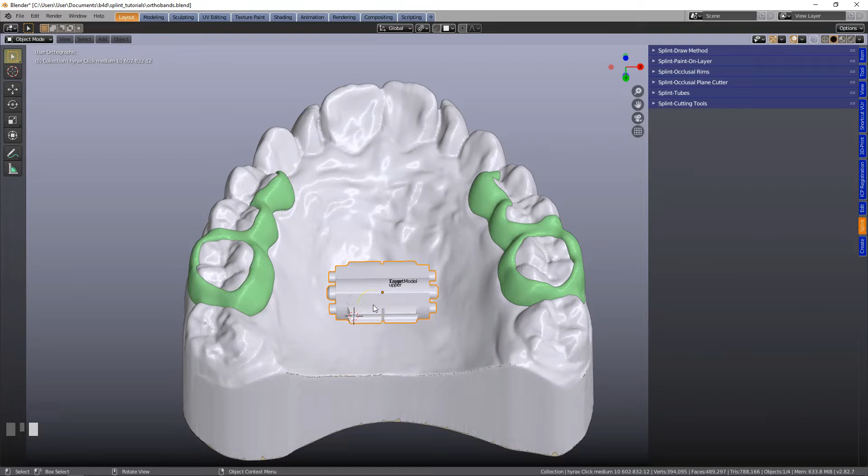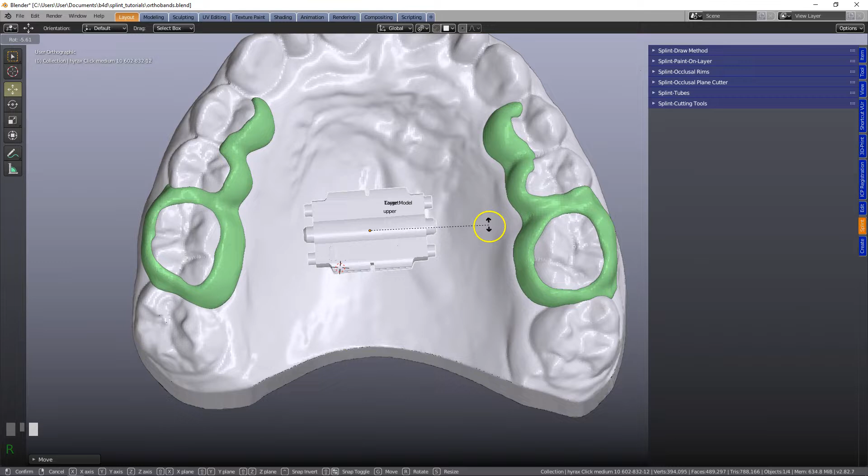Now once a component, the expansion screw, has been imported, we need to make sure that we only move this according to the Blender coordinates. By using the transformation on the left hand side, we can move it by using the arrows, or using GX or GY or GZ. This is important that users don't rotate it in any different direction, because we need to ensure that the tube gets extruded along the X direction so that it fits exactly into this wedge.

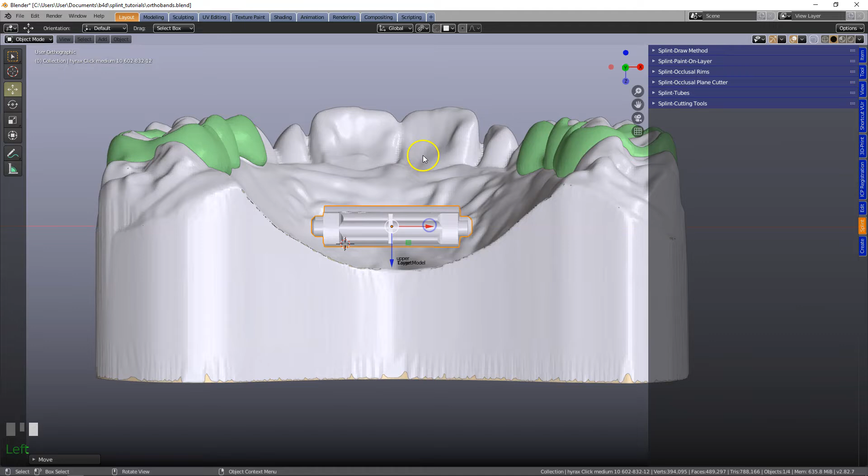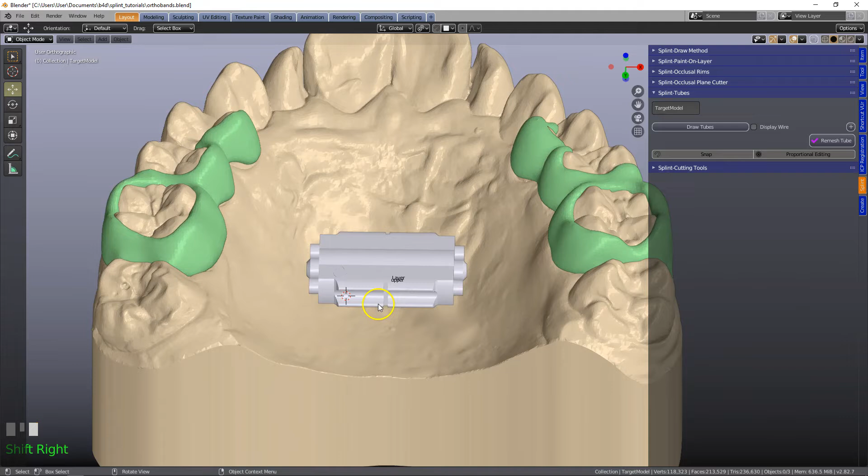So moving the component where it should be located, we will then hide the passive model away from the view, as we don't need to see it at this stage. Then, double checking that the component is correct, we're going to then open up the tubes. The expansion screw needs to be placed a little bit closer towards the palate, and then Shift right click to place the cursor.

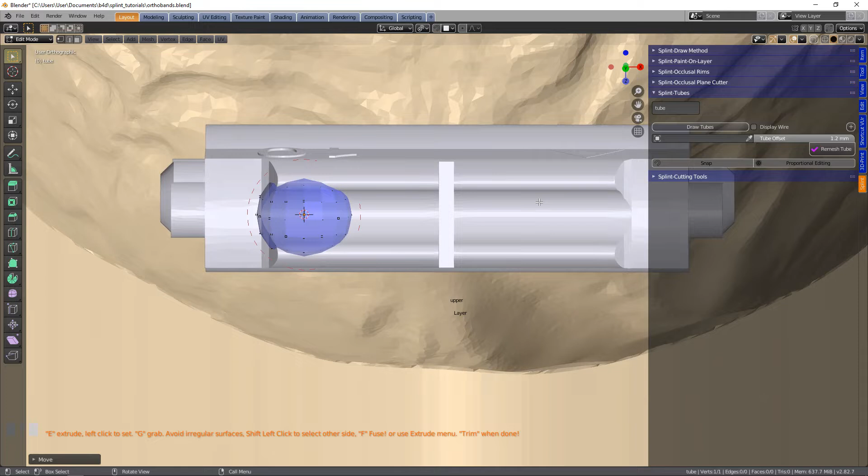Then draw tubes. This places a sphere on the inside of the wedge, and now by using E to extrude and X in the X direction. At this stage we need to make sure that the snapping tool is not engaged, and then using E and the X, it will extrude parallel to our component.

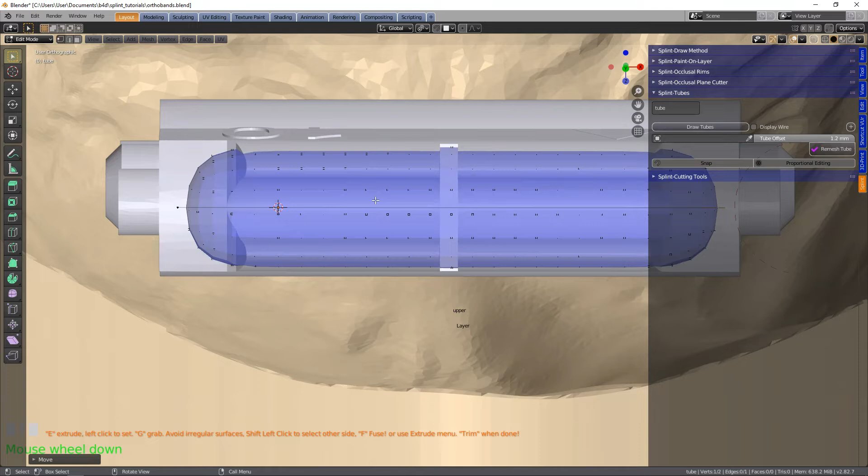Selecting the other side, G to grab, X in the X direction, G to grab and X in the X direction. Now this may be a little bit large, we need to downscale it, and one can see that the subdivisions have been marked. So to unmark them, toggle the Tab key, tab in and tab out, and that will disappear. A to select all the vertices, and then Control A to make it smaller.

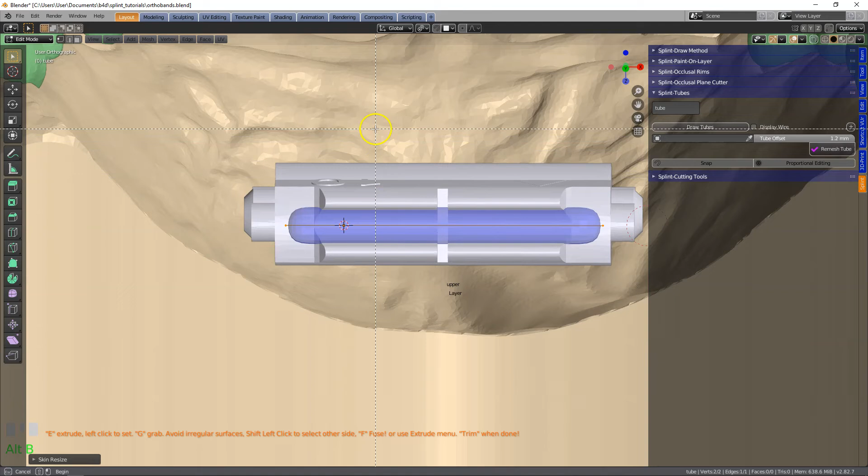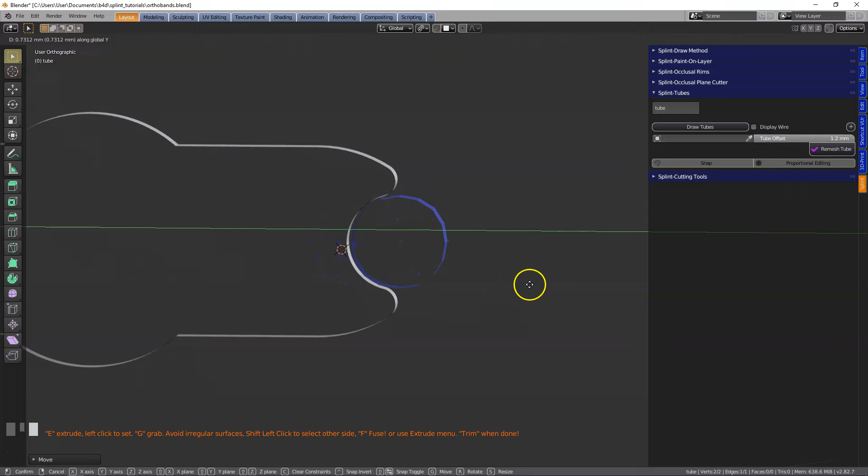Alt B to make a cross section, and we're going to view it from the side. Now we are still in edit mode and we have selected all of them. A, make sure that they're selected, and then using GY in the Y direction, and then maybe a little bit smaller, Control A, and then placing it correctly.

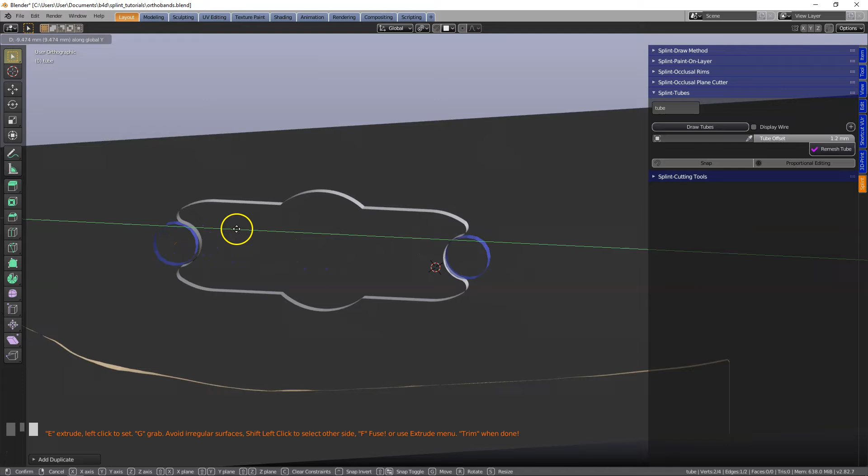We are then going to duplicate these two vertices by using Shift D to duplicate, and then using GY to move it into the Y direction, and GY to make sure it's placed correctly. Now we can use Alt B to exit.

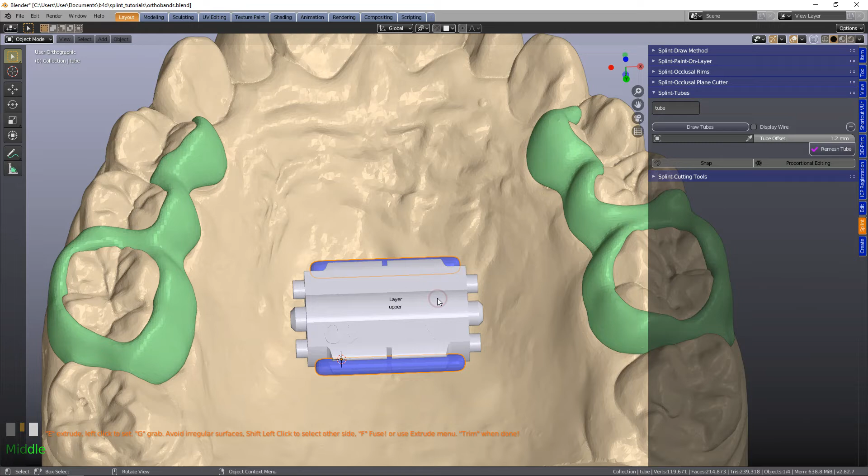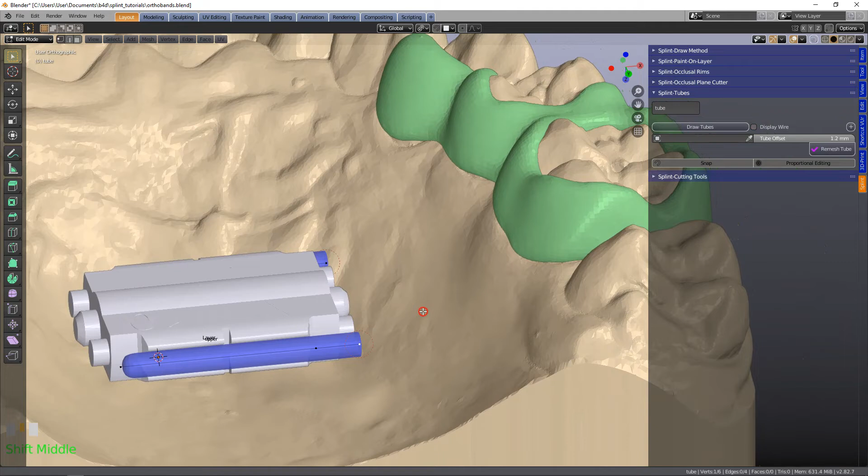Next we're going to select our object, Tab to go into edit mode, and we're going to be selecting both vertices on either side, and then E to extrude and X into the X direction. This is important so that our tubes don't bend when we move them upwards. Then select one vertex, make sure that the snapping is on the magnet tool, because we're going to snap it to our band. And the same, E to extrude, and then move it up to the band.

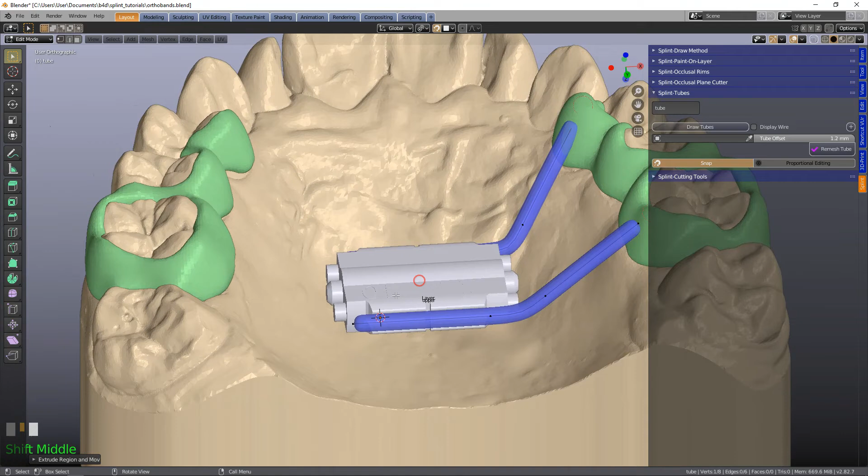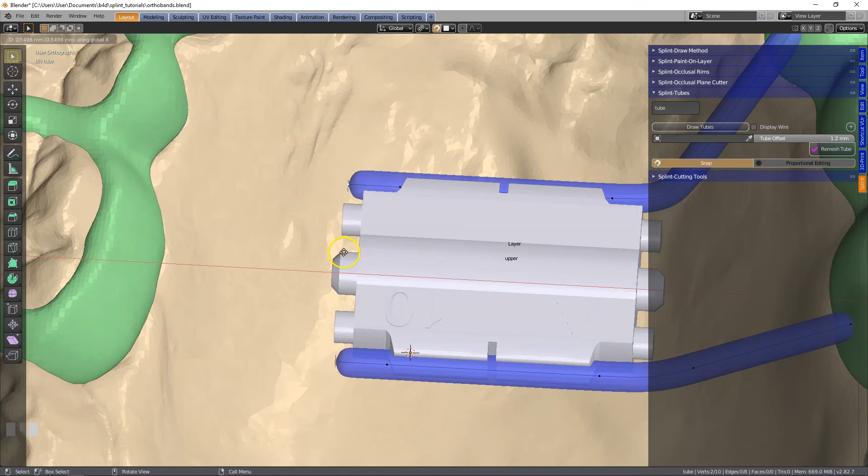Here we can see we haven't extruded it, so we need to be careful to select both, E to extrude in the X direction, and then selecting one of the vertices and then making sure the snapping tool is on, E, and then move it up and snap it onto the band.

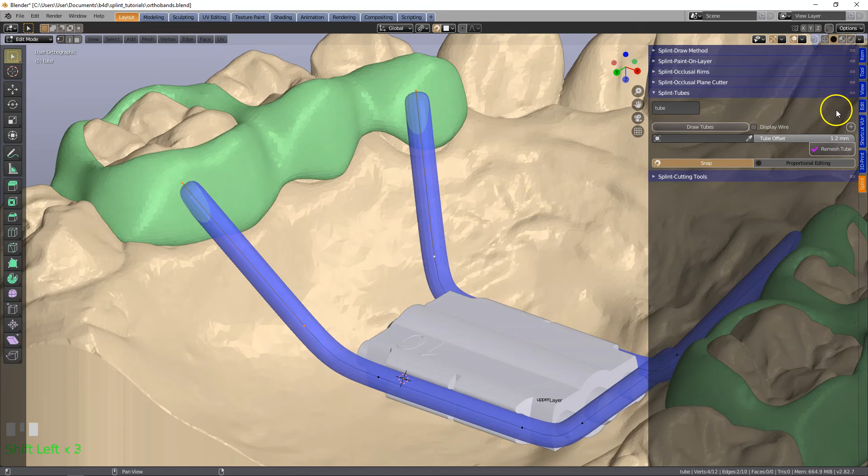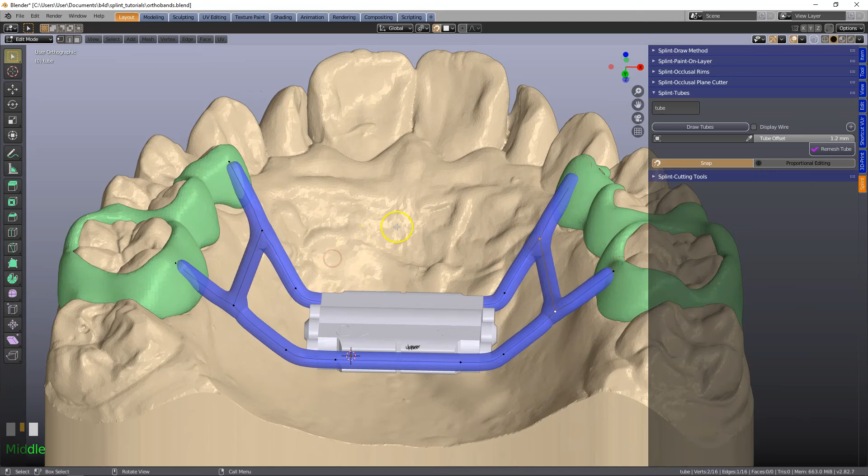We can reinforce these wires by selecting four of them and then clicking on the plus sign and then selecting two of them and using the F key to fuse them. And likewise we can do the same on the other side. And fuse them. Once we are done, we can display the wire.

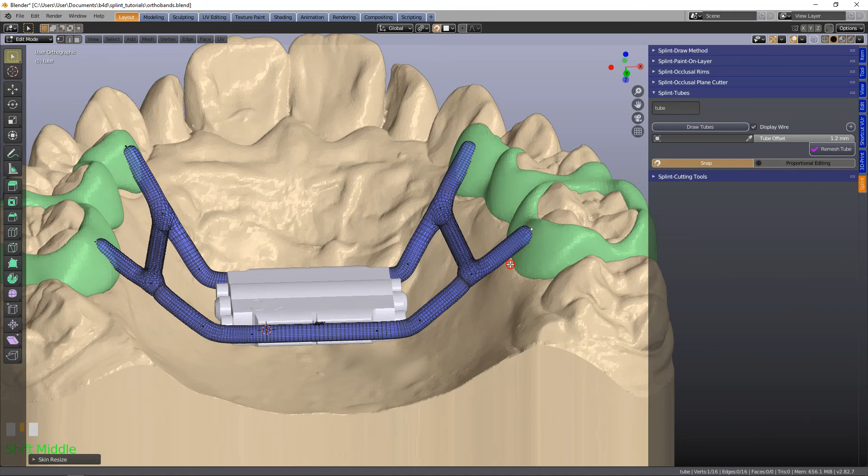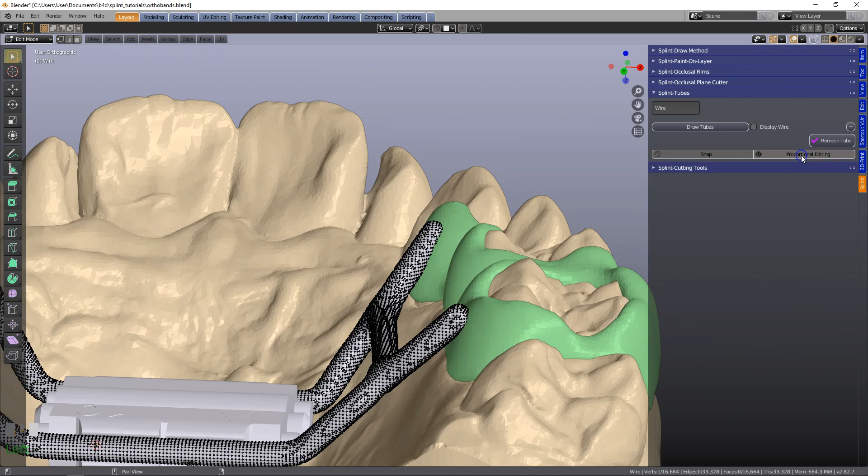If you like, you can expand the vertices by selecting it and Control A to make them thicker or thinner. Once that's done, we will exit edit mode and then remesh tube. At this stage we may still edit the tubes by pressing Tab to go into edit mode, then selecting one of these vertices, making sure the proportional editing is on, use the G key, and then we may grab and manipulate the mesh as desired.